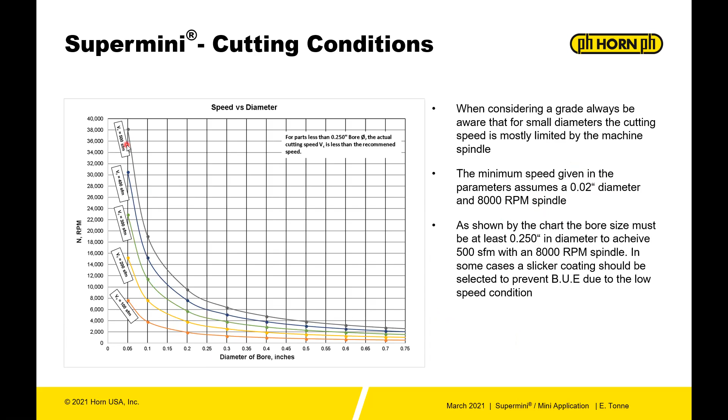You'll see what I'm talking about in this chart, and this is true throughout Horn technical documentation: 46 surface feet to 590. That's a very broad range, but you're dealing with tools that range from about 8 thousandths all the way up to 6 millimeter, or 236 thousandths, so you're dealing in that low range of cutting speeds. This isn't a mistake and it's not meant to be overly broad, it's just covering that situation where you might have an 8,000 RPM spindle and a 20 thousandths diameter part or inner diameter, so you'll be right around 46 surface feet.

The real way to handle this when dealing with other size parts is to take the top end number and multiply it by 0.6, using that as your starting point. You shouldn't have any problem with tool failure in that range, and then go up from there. Most of the time, especially if you're less than a quarter inch diameter, you're going to be limited by the machine spindle, however that spindle is run - whether at max RPM or backed down to 500 or 1,000 RPM. But this will keep you out of trouble across the different material groups.

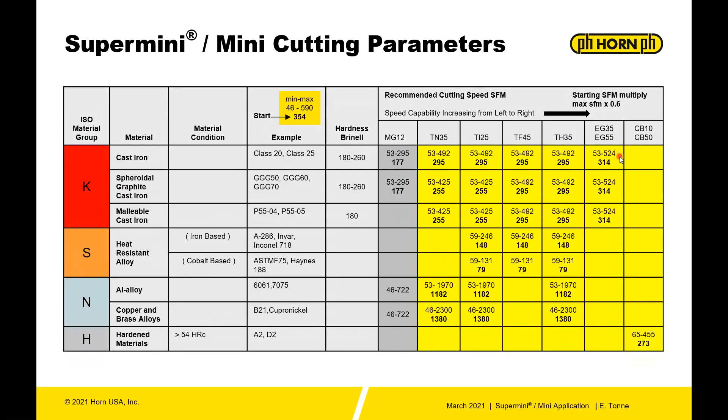Same thing for the K group - the irons, the heat resistant alloys (iron based and cobalt based), the non-ferrous group, and the hard materials. Take your high end number, whether for a specific grade - let's say with EG35 or EG55 you have 524 as the top end - take 60%, start there, and work your way up.

The other parameter to think about is the feed per rev. The Supermini and Mini tools use feed per rev, so you'll notice that grooving, profiling, and face grooving more or less start on the same low end of 4/10 to 8/10 minimum, and that's important. Minimum feed is actually very important because if you run below the minimum, you're not running above the edge prep - you're rubbing the material rather than cutting. So you need to run at least the minimum for a given tool, and the maximum is 8/10 for grooving, 2 thousandths for profiling, and 2 thousandths for face grooving.

2 thousandths per rev doesn't seem like a lot, but when you're running 4,000 RPM, you're going to be moving pretty quickly across the part. With the Mini, a little bit heavier, more aggressive feed - so 4/10 on the low end to 1 thousandth 2/10 for grooving, then in profiling 1 thousandth 2/10 to 4 thousandths, then in face grooving 8/10 to 3 thousandths.

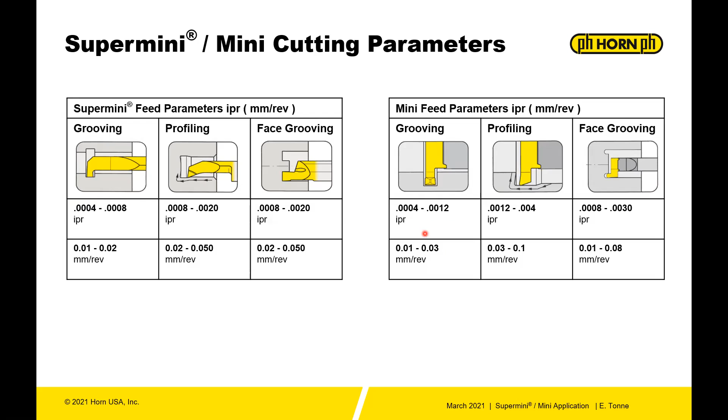Also think about your depth when it comes to your cutting radius. You use a larger radius for improved surface finish, but your depth of cut needs to match that. In a boring operation, you have more than T-max depth, so if you're straight boring into a part, you have to figure that out based on the tool. But you don't want to use a depth of cut that's too low, because once you wrap the insert around this radius, the force pushes your tool down into the part, giving you a more stable and consistent surface finish. So always keep that in mind, and try to run above the radius.

If you're doing a roughing or semi-finishing operation, try to go 1 times the radius. If you're doing finishing, try to take at least half the radius. For the roughing max, if you're doing profiling, that's really the T-max value or the depth of groove value given. For finishing, taking 25% of whatever the T-max is is a good rule of thumb.

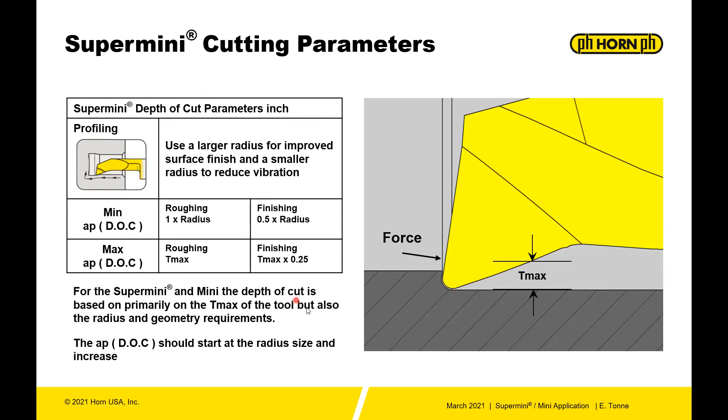Also think about the length of your tool in this slide. What's the L2 value? How far is it sticking out from the fixation here to the holder? With easy materials - steels, P group, N group, aluminums, and K, which is iron - for example a 1018 low carbon steel, a 6061 aluminum, or gray iron, you can really go greater than 16 thousandths if you're in a short condition. We're talking specifically about boring operations here.

If you're doing profiling, you cannot exceed the T-max because you'll have a clearance issue. But for just straight boring, you can go greater than 16 thousandths. If it's long L2, so if you're extended out, sort of 2 and 3 times here, make sure to stay within 8 to 16.

For average material, like 4140s, 316 stainless, or 420 stainless - if you're in a short, stubbed up L2 condition, you can use 4 to 16. If you're long, use 8 to 16. Then for difficult alloys like titanium 6Al4V, nickel alloys like 718 Inconel, or cobalt alloys like ASTM F75 - really difficult alloys - stay within 4 to 8 on the short extension, and also 4 to 8 on the long extension. The diameter to length ratio doesn't give you much benefit in stubbing up with the difficult alloys, so just take your time with those to make sure you always have the best results.

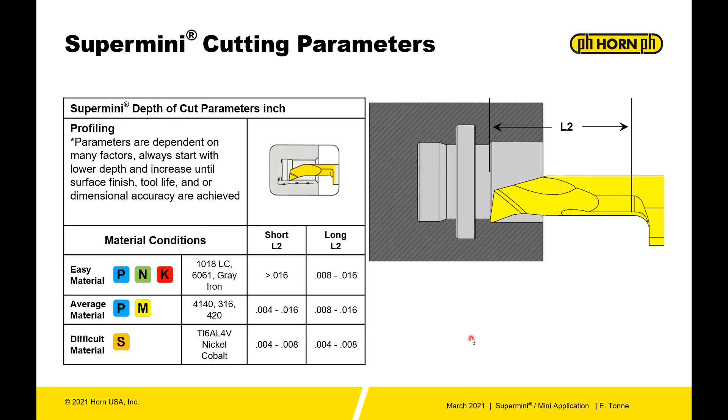Looking at the mini cutting parameters too - I didn't want to leave out the mini with respect to AP max. For the R geometry, for instance, you have an AP max and you also have a T max. The AP max is more or less for boring, and the T max is more or less a profiling limitation. So always stay within both values - if you're boring, focus on AP max, if you're profiling, focus on T max. T max is generally much less than your AP max, just because you have an angle on the back of the tool that limits it with respect to depth.

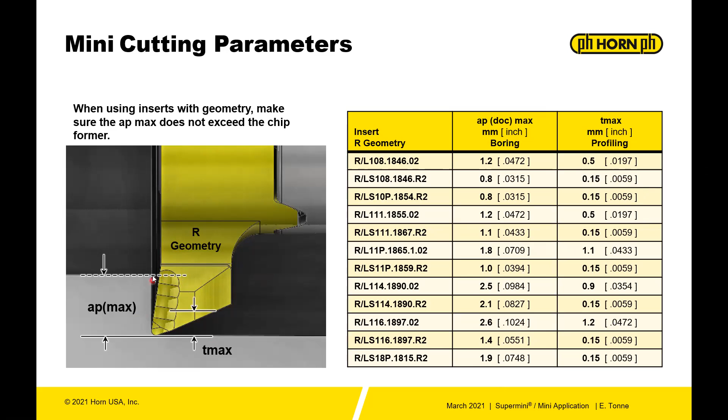For instance, on profiling, you're going to range anywhere from a half a millimeter or 19 thousandths, down to some that are even shallower, like 6 thousandths, 5 thousandths, 9 tenths. On the AP side though, you can go up to 102 thousandths. So always check that, look at the insert, and make sure you're not exceeding the chip former.

When you're using the D geometry, it does do side turning, but that's not its primary function. So be sure not to bury this thing all the way up to the top here - it will have less effect of chip curling once it's past this dish up at the top. But in side turning, for inch, for instance, you can go 40 thousandths all the way up to 118 thousandths if you're on a 114 insert. So just keep all these depths in mind.

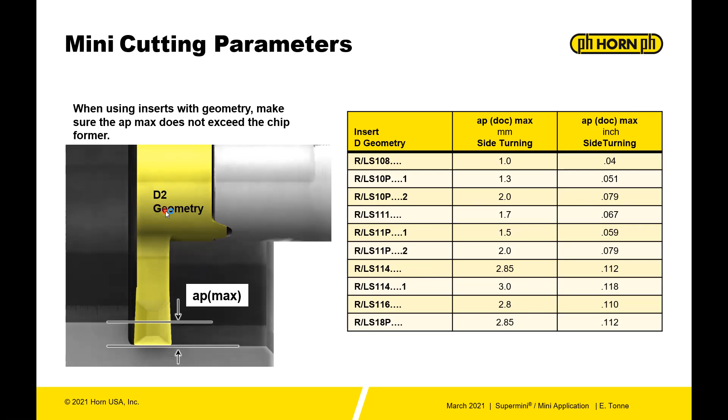With side turning too, just be aware that the D2 geometry can do side turning, but it's not the primary function of that. Always keep that in mind.